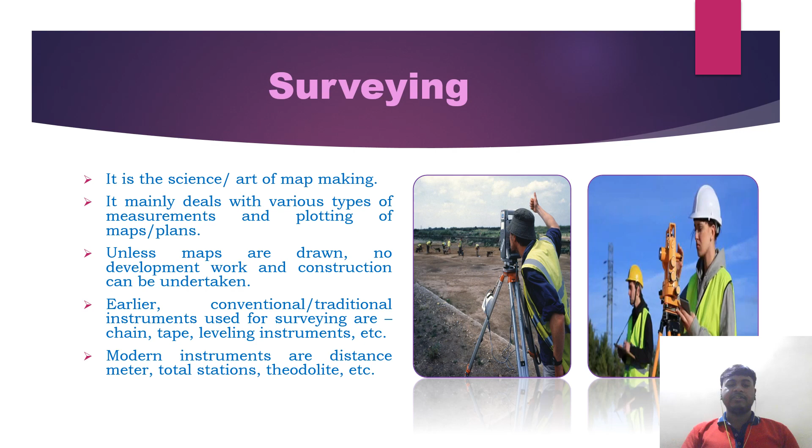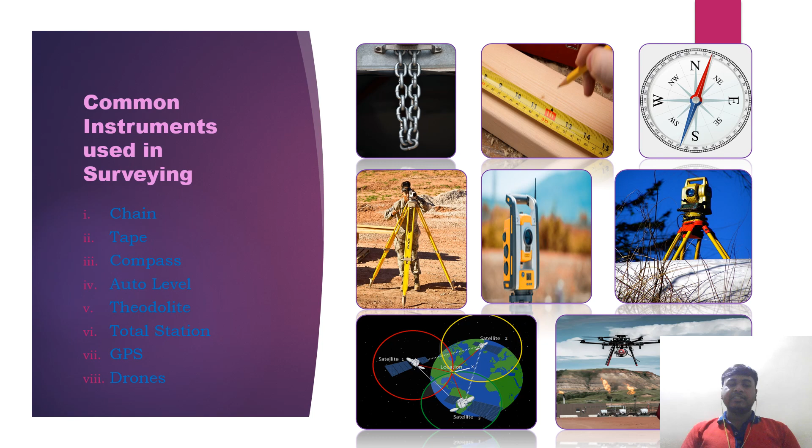Common instruments used in surveying: chain, tape, compass, auto level, theodolite, total station, GPS, drones, as you can see in the figures. Now, classification of surveying.

Plane surveying. In this type of surveying, the effect of curvature of the surface of Earth is not taken into account. Therefore, plane surveying is adopted for small areas and the degree of accuracy of plane surveying is relatively low.

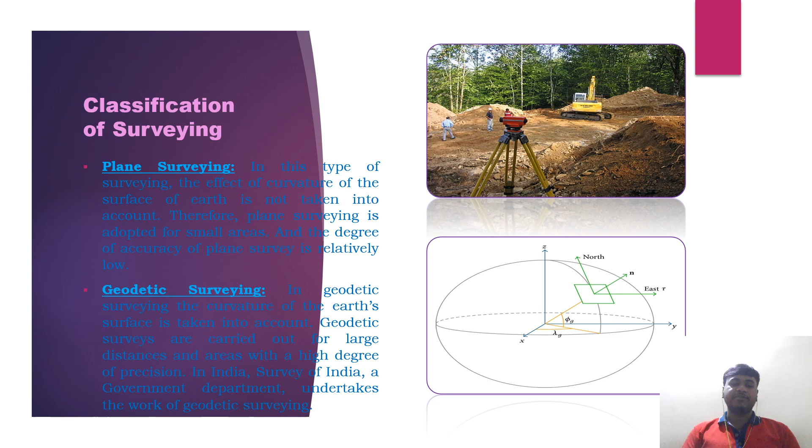Geodetic surveying. In geodetic surveying, the curvature of the Earth's surface is taken into account. Geodetic surveys are carried out for large distances and areas with a high degree of precision. In India, the Survey of India, a government department, undertakes the work of geodetic surveying.

Structural engineering mainly deals with analysis and design of various structures like steel structures and concrete structures. Steel structures include trusses in industrial buildings, towers, etc. Concrete structures include buildings, bridges, dams, etc.

This consists of analysis and design. Analysis is assessing or determining the internal forces or stresses developed in structural components of any structure due to applied load. For example, structural components in buildings are beam, column, etc.

Design is fixing or finding the suitable dimensions - breadth, depth, length, etc. - for structural components of any structure using various methods. For example, load acting on a structure is ultimately transferred to the ground, the soil, through beams, columns, foundation, etc.

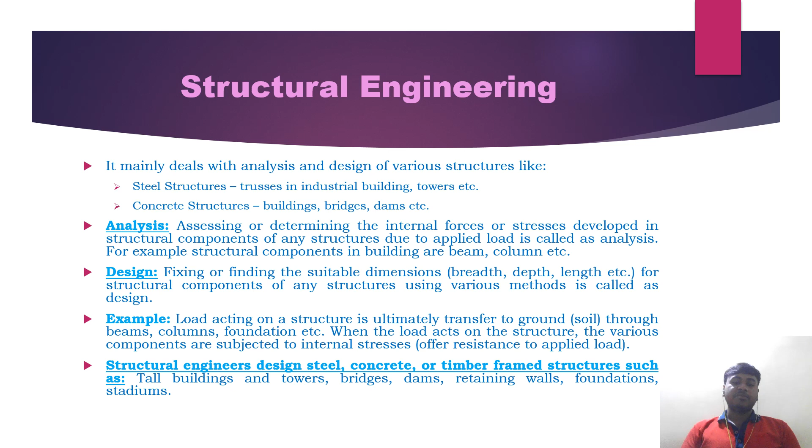When the load acts on the structure, the various components are subjected to internal stresses as a resistance to the applied load. Structural engineers design steel, concrete or timber framed structures such as tall buildings and towers, bridges, dams, retaining walls, foundations, stadiums, as you can see in the figures.

The following are the uses of structural engineering: analysis and design of dams, bridges, stadiums, auditoriums, multi-story buildings; analysis and design of power generation stations; analysis and design of steel industrial structures; repair, rehabilitation and maintenance of structures; design of nuclear power plants; design of structural reinforcement for different types of structural components.

Now we will go for geotechnical engineering. It mainly deals with the study of soil, its types, and their properties. Soil properties may change from place to place, depth to depth, layer to layer, and even in the same place from season to season.

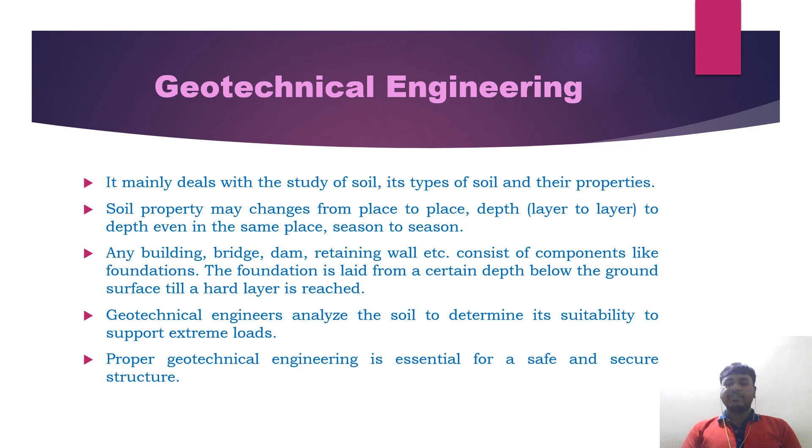Any building, bridge, dam, retaining wall, etc. consists of components like foundations. The foundation is laid from a certain depth below the ground surface till a hard layer is reached. Geotechnical engineers analyze the soil to determine its suitability to support extreme loads. Proper geotechnical engineering is essential for a safe and secure structure.

The following are the uses of geotechnical engineering: to assess the quality and strength of soil or rock, to construct civil engineering structures, to design retaining walls for soil retainment, to decide the type of foundations for different types of structures, and for the design of roads for transportation facilities.

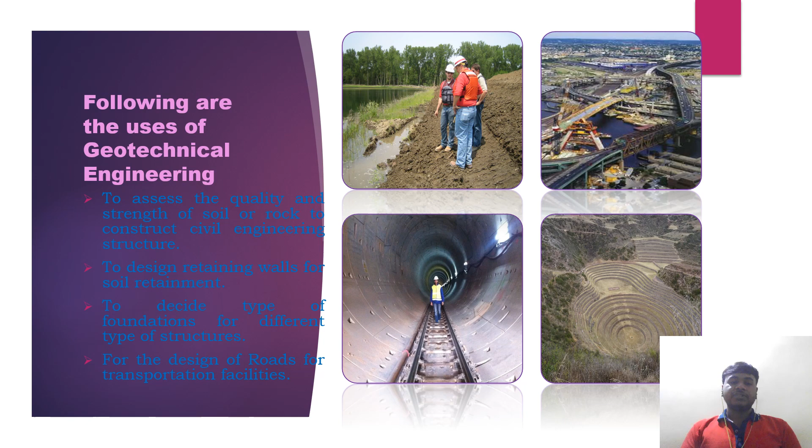Now let's go for hydraulics and water resources engineering. Hydraulics - as we know, water is a very important need for all human beings - mainly deals with the study of mechanics of water and its characteristics like pipe flows, open channel flows, dams, irrigation, hydropower, etc.

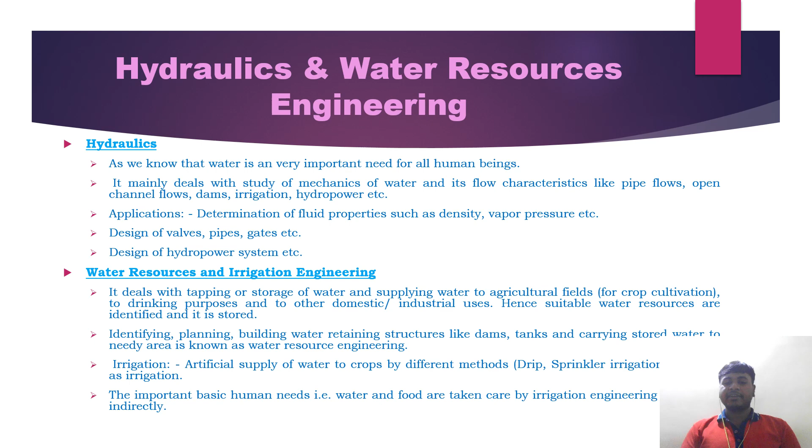Hence, suitable water resources are identified and stored. Identifying, planning, and building water retaining structures like dams and tanks, and carrying stored water to the needy area, is known as water resource engineering. Irrigation is the artificial supply of water to crops by different methods such as drip and sprinkler irrigation. The important basic human needs - water and food - are indirectly taken care of by irrigation engineering.

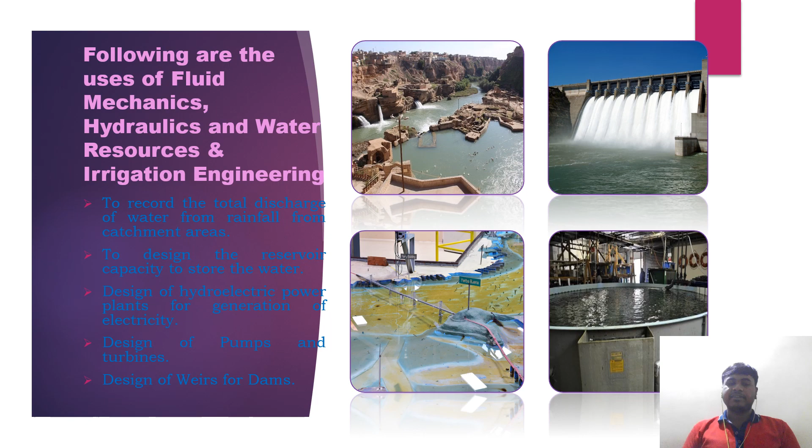Following are the uses of fluid mechanics, hydraulics, and water resources and irrigation engineering: to record the total discharge of water from rainfall from catchment area, to design the reservoir capacity to store the water, design of hydroelectric power plants for generation of electricity, design of pumps and turbines, design of weirs for dams, as you can see in the figures.

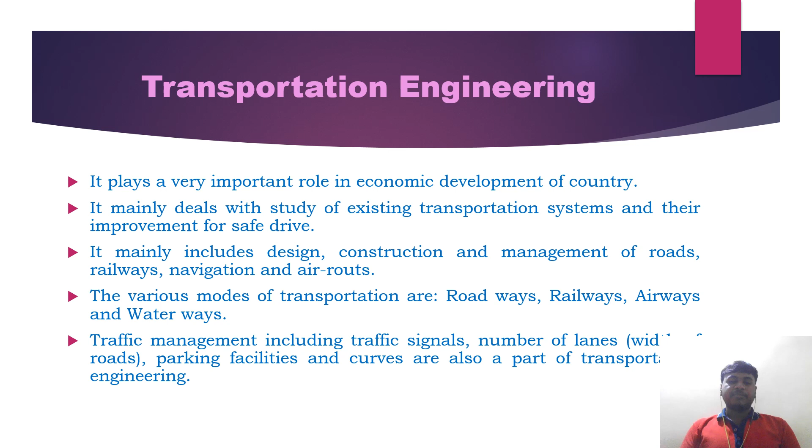Transportation engineering plays a very important role in economic development of a country. It mainly deals with study of existing transportation systems and the improvement for safe drive. It includes design, construction, and management of roads, railways, navigation, and air routes. The various modes of transportation are roadways, railways, airways, and waterways. Traffic management, including traffic signals, number of lanes, parking facilities, and curves, are also part of transportation engineering.

The following are the scopes of transportation engineering: it involves planning, design, construction, operation, and maintenance of transportation facilities; planning and design of airstrips, runways, roads, harbors, and railways; maintenance and upgradation of harbors, airports, railway systems based on requirements; it contributes to economic, industrial, social, and cultural development of any country; and design of traffic signals for control of traffic, etc., as you can see in the figures.

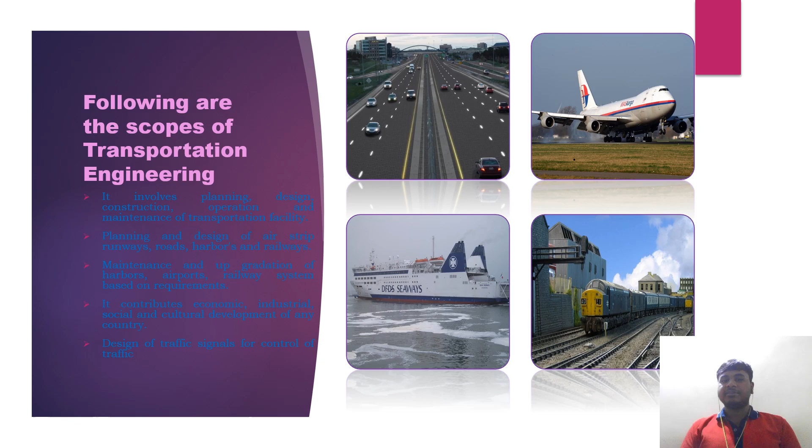Now let's go for environmental engineering. This is an important branch of civil engineering which covers both water supply and sanitary engineering. The importance of a clean environment was felt with the rapid growth in population and growth in urbanization and industries. The science of civil engineering deals with the subject of tapping water from different sources, testing its quality, purification processes,

and distribution of water to the consumers. Similarly, environmental engineering encompasses the subject of treatment of waste which originates from different sources, and deals with the removal of harmful substances in this waste by different processes. The impact of waste originating from industries is felt by living organisms if such waste contains toxic substances. The central government as well as state governments have enacted laws for protection of the environment needed for the safe living of human beings.

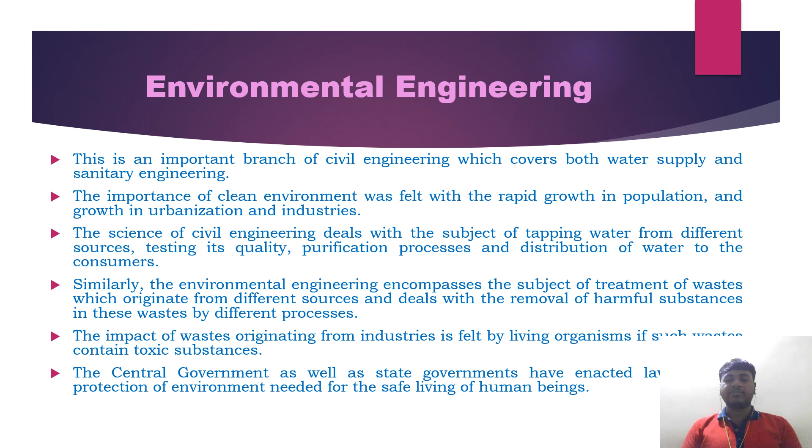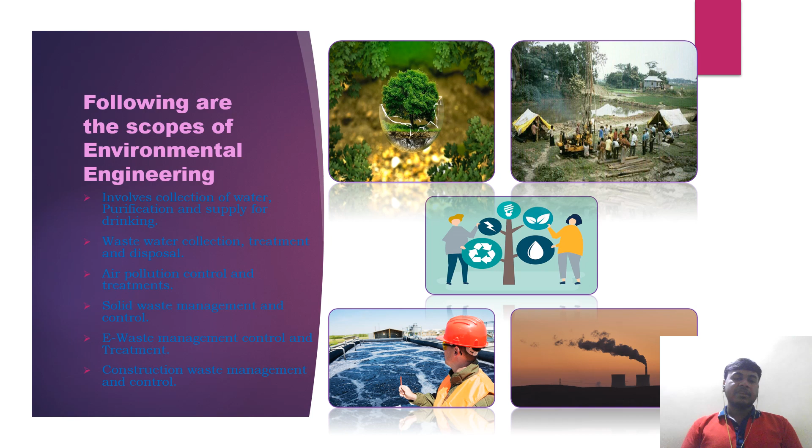The following are the scopes of environmental engineering: it involves collection of water, purification and supply for drinking; wastewater collection, treatment and disposal; air pollution control and treatment; solid waste management and control; e-waste management, control and treatment; and construction waste management and control.

Construction planning and project management. Construction planning deals with different types of construction of structures like buildings, roads, bridges, etc., and construction of underground tunnels using modern equipment, and construction of floating structures. In earlier days only manpower was utilized for construction, but development of new technology, that is manufacture of new machineries like cranes to lift weight, painting machines, plastering machines, concrete or tar laying machines, have made construction easy and faster. It mainly includes excavation of soil, construction of foundation, concreting, finishing, etc. with different techniques and methods.

Project management involves planning for construction equipment and machinery for a construction project, dealing with planning, scheduling, and execution of construction activity related to a project. It comprises man, material, time, and money management. Emphasis will be on new construction practices such as precast construction and pre-stressed construction, safety of man and material, utilization of marginal materials, etc.

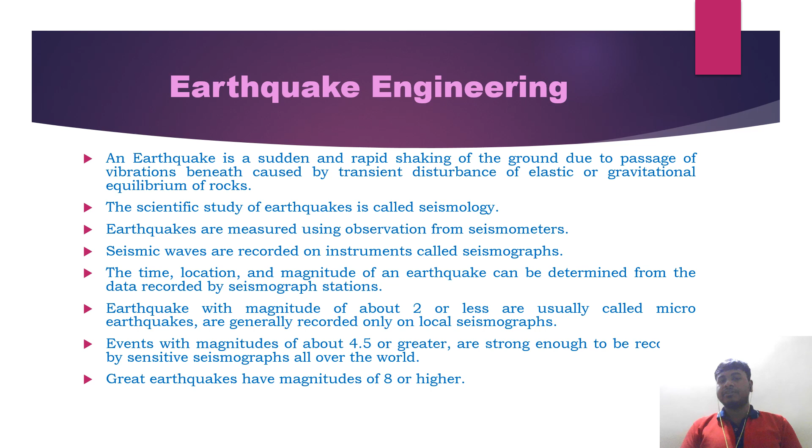Earthquakes with magnitude of about 2 or less are usually called micro-earthquakes and generally recorded only on local seismographs. Events with magnitudes of about 4.5 or greater are strong enough to be recorded by sensitive seismographs all over the world. Great earthquakes have magnitudes of 8 or higher. As you can see, we can use civil engineering for making earthquake-free construction.

Now, remote sensing and GIS. This is one of the new fields. The improvement in space technology and the availability of GPS enhance the scope of geographic information systems. Good mapping techniques help us get required information accurately and quickly to effectively manage and monitor available resources for optimal use. GIS is a high-tech equivalent of a map. It represents some means to locate ourselves in relation to the world around us. It deals with measurement, mapping, monitoring, and modeling of geographic information around us.

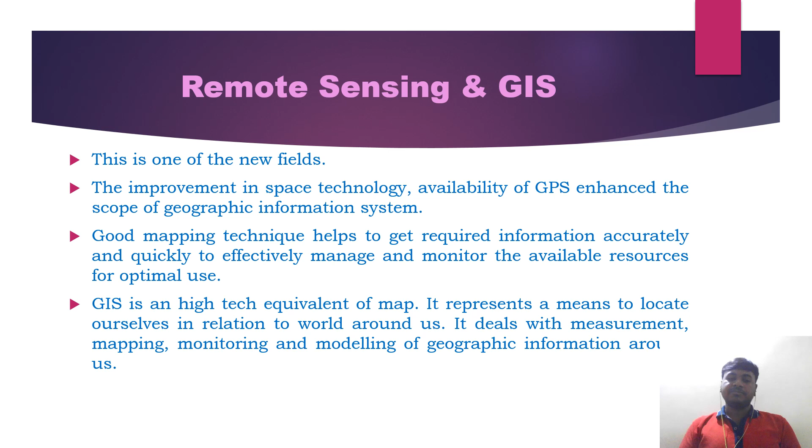Remote sensing and GIS basically uses satellites and information through GPS, etc. So that's it for today. Thank you for watching.